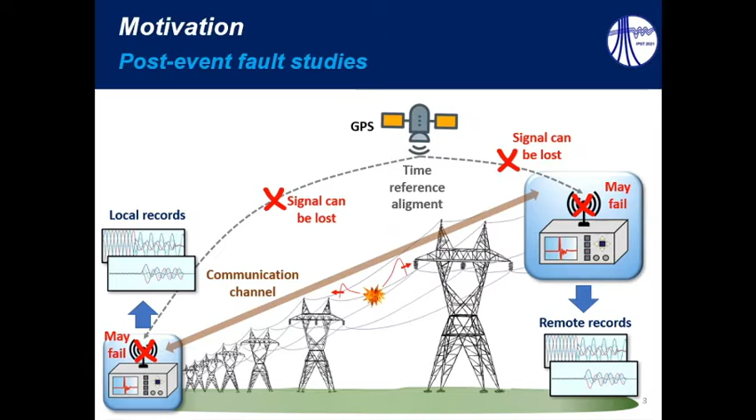However, we know that the GPS antennas may fail, the GPS signal can be lost, the communication channel may fail, or it can be out of service, in such a way that in this case, using unsynchronized records in post-fault studies may be a problem, especially if you need microsecond timescale accuracy.

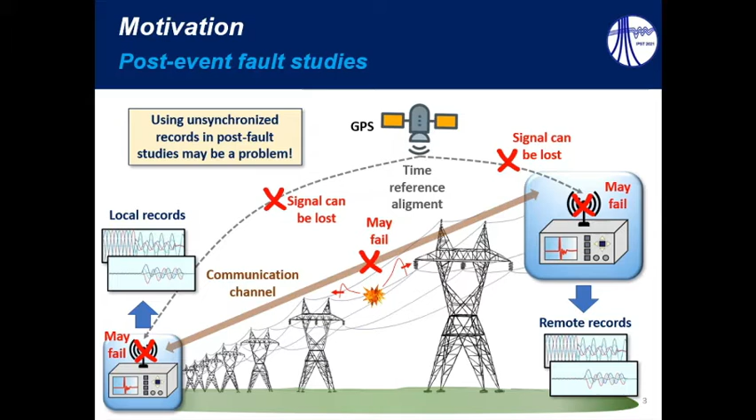Thus, in order to obtain a time synchronization with microsecond accuracy, in this paper we analyzed traveling waves. Basically, we consider a given bus L as reference, and at the opposite line side, we consider the existence of a bus R, which represents the remote bus, the unsynchronized bus in which there is a synchronization error xi.

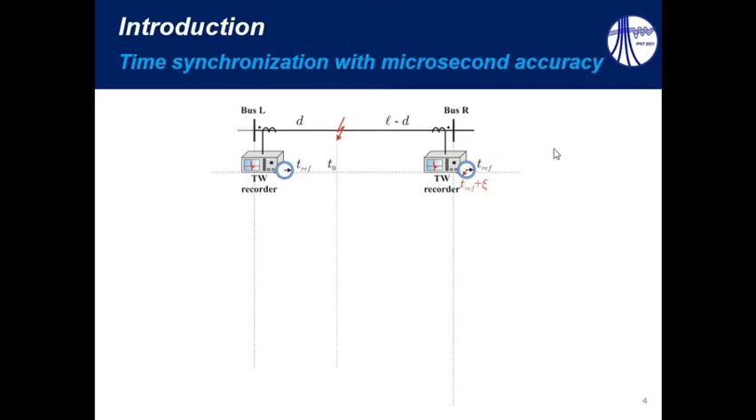Therefore, when a fault takes place on this line, it can be concluded that the real traveling waves will be measured correctly, considering the correct reference, only at bus L. So we can detect here TL1 and TL1R, which stands for the time instant at which the reflection from the fault reached the monitored bus.

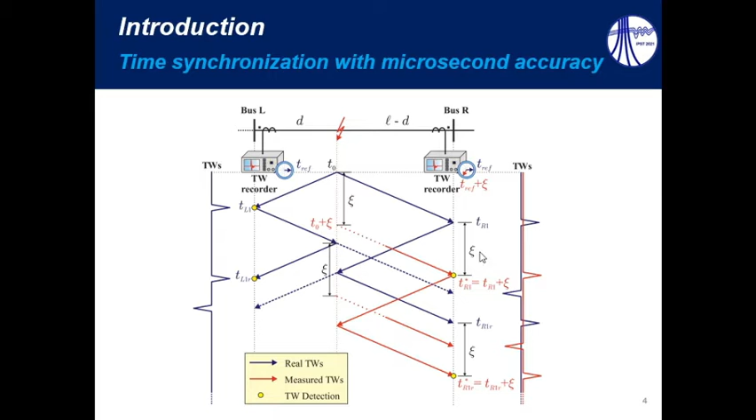However, if we consider the bus R measurements, it is easy to perceive that there will exist a time displacement here due to the synchronization error, in such a way that the measured traveling waves will be different from the real ones. So our goal here is to compensate this error, xi.

In 2020, we published a paper in which an automated solution for local and remote data time synchronization was presented. Basically, in this paper, we calculate a synchronization term kappa, which is a function of the line travel time tau and of the arrival times of the fault launched waves which reach the monitored buses at bus R and bus L. But regarding these time differences here, okay, we can calculate them.

We already have technologies capable of accurately obtaining these time differences, but we have to recognize that there will always exist uncertainties in the line travel time, because the line parameters may vary over time, and even if you consider a line energization maneuver in order to calculate tau settings, these uncertainties will still exist.

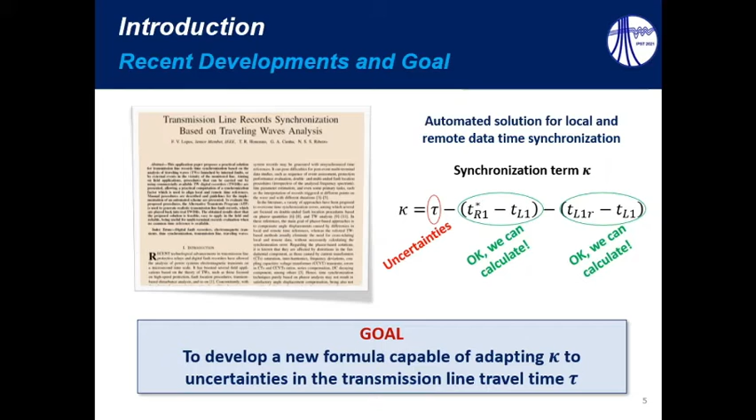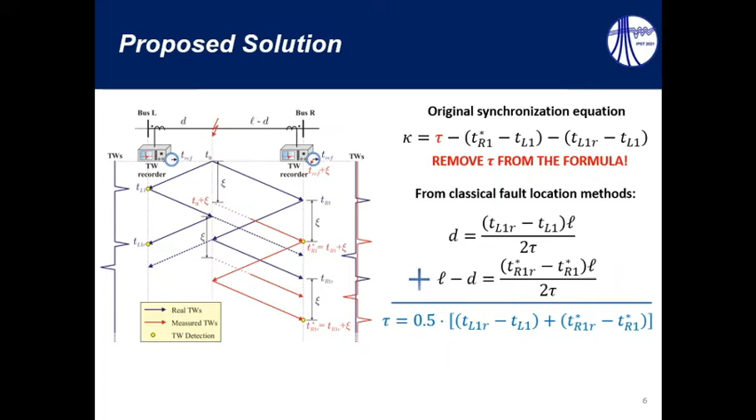So the goal of this paper is to develop a new formula capable of adapting kappa to uncertainties in transmission line travel time. To remove tau from the kappa formula, basically we analyze the classical fault location method applied to both line terminals, and we add one equation to another, and by doing so it is possible to obtain an equation that represents the line travel time.

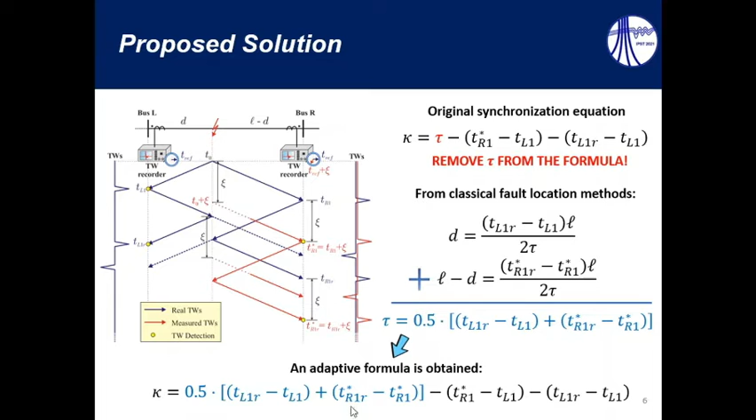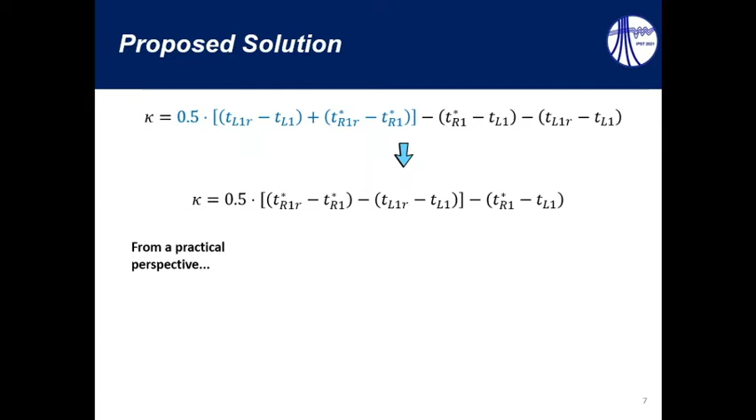Substituting this equation in the original synchronization equation, we can obtain an adaptive formula which is represented here. This formula can be further simplified, resulting in this one. And from a practical perspective, these time differences here are indirectly available in single-ended traveling wave-based fault location estimation.

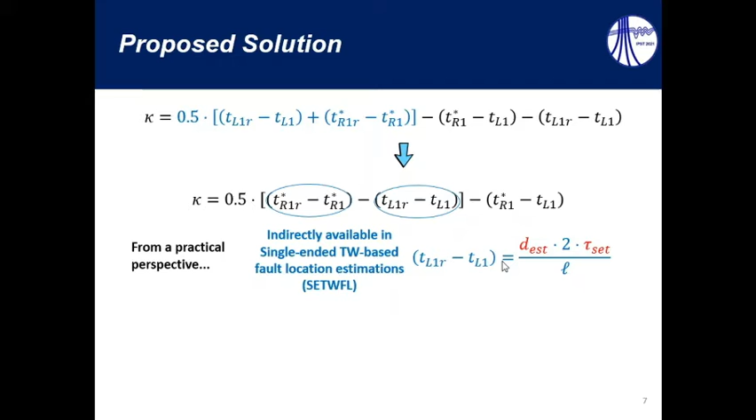Indeed, even if a wrong tau setting is used, a wrong fault distance estimation will be obtained, but these errors will be cancelled in this term at the right side here, in such a way that the time difference of interest will be accurately determined.

Thus, based on this idea, two methodologies are proposed in this paper. In methodology M1, we consider that the single-ended traveling wave-based fault location estimations are unavailable. In methodology M2, we consider that these estimations are available.

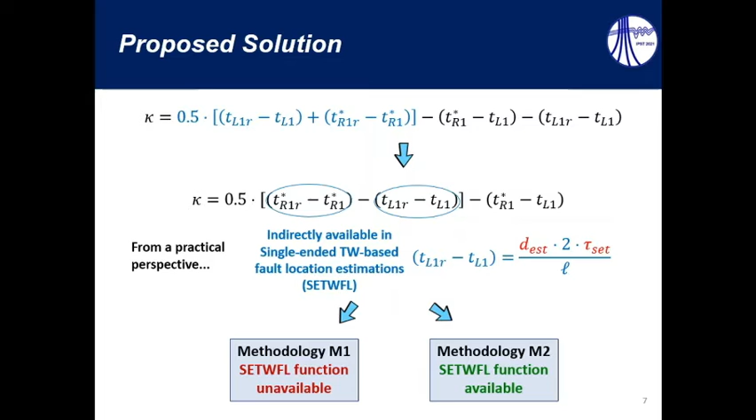Talking a little bit more about these methodologies, when we consider that the fault distance estimations are unavailable, the user must manually identify traveling waves reflected from the fault point. Different methodologies can be used, and in this paper, the search field technique is applied, which basically considers a rough phasor-based fault distance estimation, and based on that, we estimate the time instant at which we expect to see the fault reflection.

Based on that, we use some margin, and then we compare the polarities of the waves within this search field in such a way that we can detect the reflections from the fault point, and thus that synchronization formula can be further simplified, resulting in this one here.

In addition, the methodology M2 considers that the single-ended traveling wave-based fault location functions are available, so the user just has to download the fault distance estimations, and based on these estimations, we obtain this formula for kappa here. It's important to point out again that even if we use a wrong tau setting, these distance estimations will be wrong, but the kappa value will be correct.

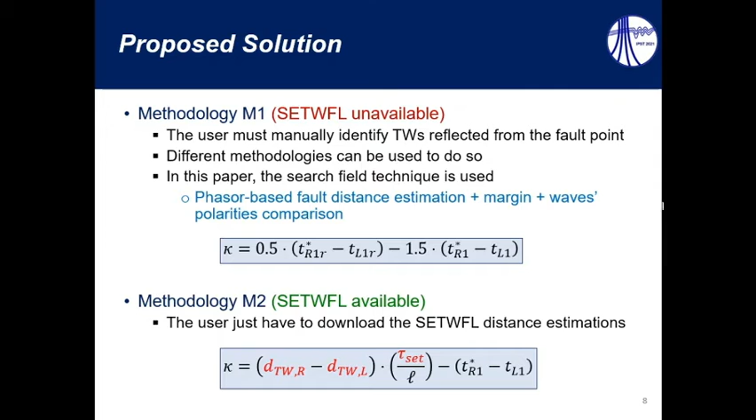So regarding the results, we started the analysis considering simulated scenarios. In this case, we consider a very realistic implementation of a Brazilian transmission line, which is implemented in the Alternative Transients Program. This is a 230 kV 60 Hz system. It is a transmission line 344.16 kilometers long, and to do so, the J-Marti model was used.

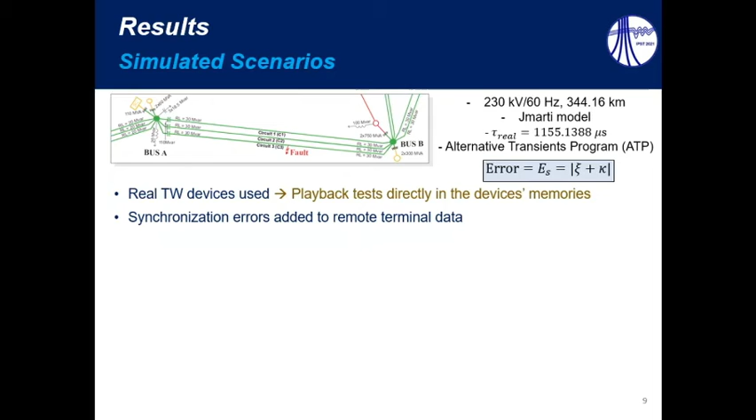This is the real line travel time of the system, and to analyze the performance of the proposed solution, the final time synchronization error ES was considered, which consists of the absolute value of the sum between the error and the synchronization term kappa. In these simulations, real traveling wave-based devices were used, and the test consisted of playback simulations directly in the device's memory. And since the simulations returned synchronized data, the synchronization errors were added manually to the remote terminal data.

So this is the illustration of one of the analyzed cases. This is a BC solid fault case, considering a fault at about 50 kilometers from bus B here. And the error included in the remote side measurements was of about 1.46 seconds. In this case, we intentionally considered an erroneous tau setting. We used 1000 microseconds, so there is a difference in relation to the real value.

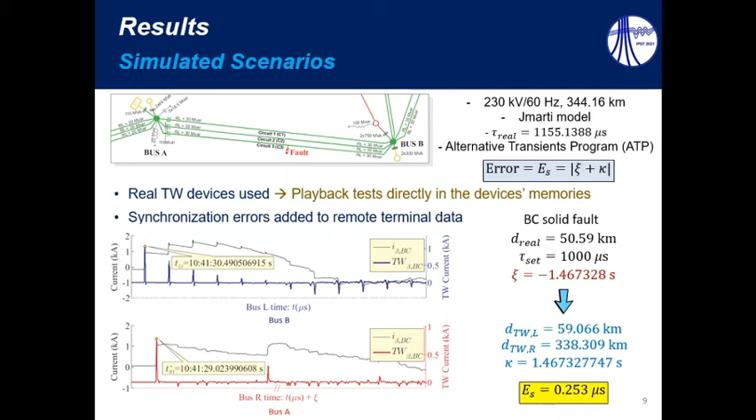And as a result, some errors were verified in the fault distance estimations. Here, something about 9 kilometers of error, which is unacceptable for traveling wave methods. But we can see that kappa was very accurate in such a way that the final synchronization error was equal only to 0.253 microsecond. The same analysis was performed for other cases, and in all the simulated cases, these synchronization errors did not exceed the order of 1 microsecond.

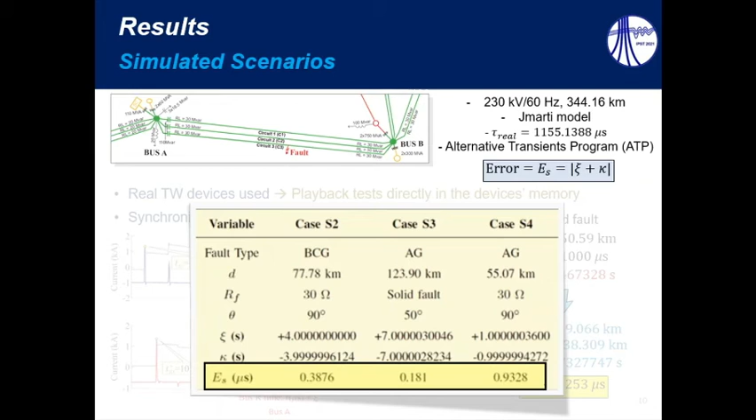So now analyzing real scenarios, firstly we took into account some cases which are originally synchronized, and then we could add some time synchronization errors. By doing so, we have a controlled case in such a way that we calculated kappa and then we compared it with this error, resulting in a final synchronization error equal to only 3.063 microseconds. This is very promising. It's smaller than 5 microseconds, for instance. So just a few microseconds were obtained, and it is important to emphasize that this is the worst case presented in this paper.

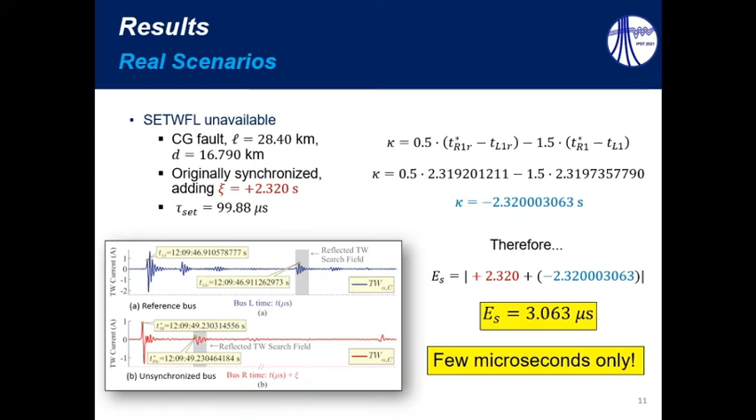In a second part, in which we evaluate also real scenarios, we took into consideration some records which were originally unsynchronized. So we used the tau setting available in the relays, and in this case we calculated a kappa term equal to about 13 seconds. It's a very huge time synchronization error. I mean, the local and remote relays are completely unsynchronized. In this case, since we do not know the real time synchronization error, we had to use the Bewley diagram to validate the proposed solution.

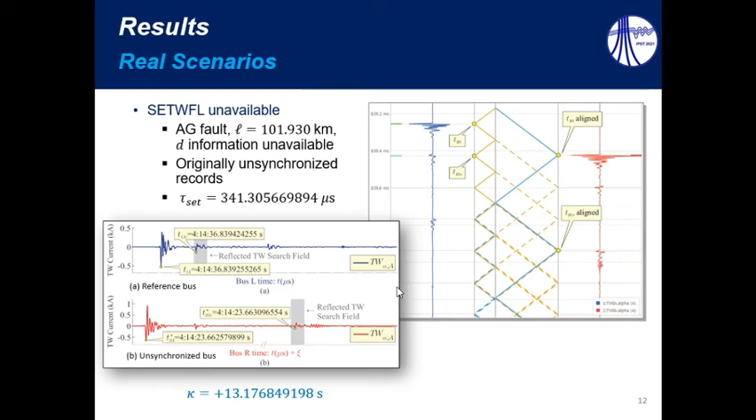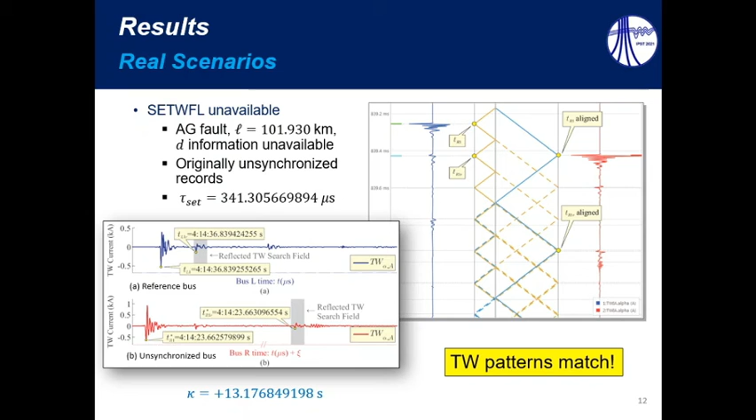And in this case, after the synchronization procedure, we could see that the traveling wave patterns match. I mean, when we put here the remote measurements, we can see that the time instants coincide and they match what we are expecting to see. So it demonstrates that the proposed solution indeed was capable of synchronizing local and remote records.

Thus, as conclusions, we can say that a reliable and accurate alternative transmission line time synchronization method was developed. It is adaptive to uncertainties in line travel time settings, and it overcomes the need for energization tests. Regarding the performance demonstration, we considered simulated and real cases. In the best case, time synchronization errors in the order of fractions of microseconds were obtained, and in the worst case, errors in the order of a few microseconds were obtained.

These results are very promising in our opinion, and even in the case in which we do not have control of time synchronization errors, in which originally unsynchronized records were analyzed, the Bewley diagram confirmed that the solution is reliable. So we can conclude that the method is a good alternative for record alignment procedures when traditional solutions are unavailable, like GPS and communication channels.